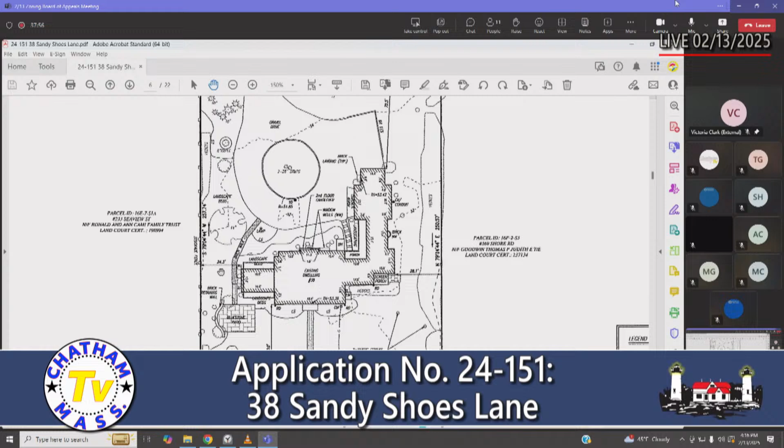As we get into the proposed project, you can see here on that westerly abutter it's 24.3 feet. That's our non-conforming issue, along with the lot area.

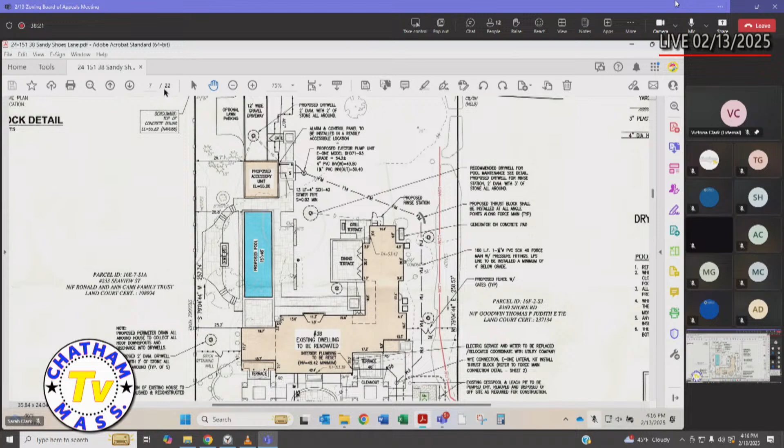The proposed structure—we're planning minor alterations and additions to the structure. We've been before the Chatham Historic Commission to review these additions. They've approved our project and worked with us to get to this final solution. The proposal includes removing this one-story addition on the westerly side and rebuilding it with additions that expand it front and back and add some second floor space, but also push it back so now we're conforming to 25.2 feet, making the entire structure conforming to the setbacks.

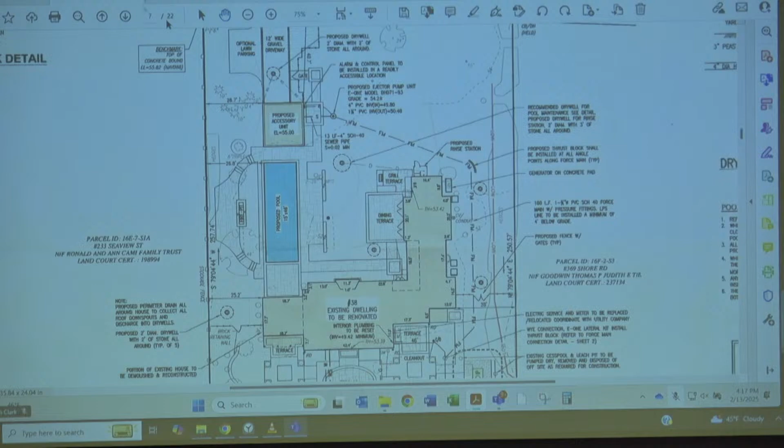Other additions include a proposed accessory structure, some minor alterations and infill of covered porches on the back side, some dormer work along the top, and if we go to Z6, the elevations sheet. Oh, sorry, you have control.

So here we have the existing elevations on top and the proposed elevations on bottom, and you can see this one-story bump going westerly. This is built on a brick pad. We don't believe there's any substantial foundation underneath it. So we're turning it, it is conditioned space currently, it does have baseboard heat. We are removing this bump to include a second floor over it, and again, expanding it frontward and backward.

You can see the dimension here, 19'4". We're at 18'8", so that is pushing in to accommodate that setback. Other changes include the single window dormers on this roof line going to double window dormers. The view from the second floor is quite amazing, and we have very small opportunities in the existing for that view.

Over Shore Road and onto the bar and water view out beyond. The rest of the changes, we're replacing windows, updating siding, locating windows in exact locations and updating the screen porch here. You can see this new chimney structure—that is a faux chimney structure. It's a nod to the original blueprints we found of the property from 1930, where this was included as part of the original scope of work, and we felt it a nice nod to the original design to bring that back.

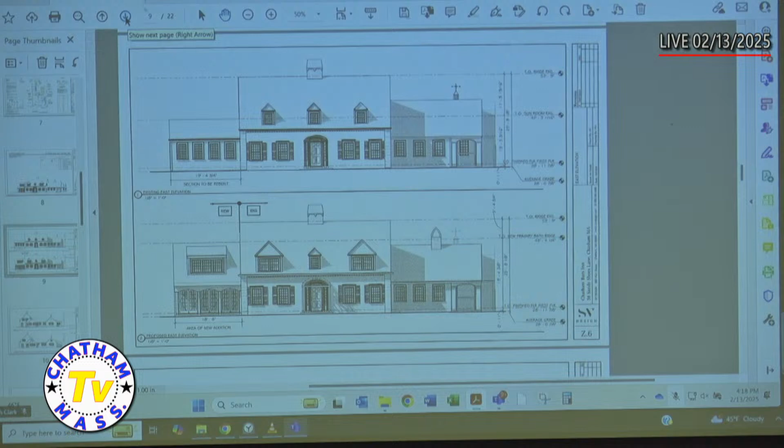If we go to the next sheet, please, Sarah. So on this northerly elevation, there's not much change. Again, we're updating siding, updating trim, reworking the original details as best we can, trying to preserve as much as we can, replacing in kind where we can't. You can see some of the windows have changed location slightly. We're altering some of the windows in this center section and creating a habitable space in this garage and lean-to structure on the side. Next elevation, please.

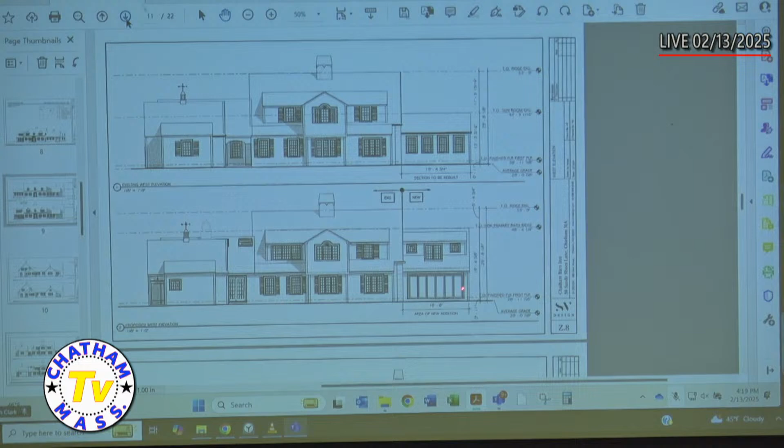From the Sandy Shoe side—Sandy Shoes is an interesting lane tucked between Shore Road and the golf course, you might never know that it's there. So this is the approach from that backside as you're coming around the corner. You're seeing here this existing covered porch and this inside L, where we're infilling that with habitable space, some exterior doors, and increasing the habitable space from the inside. The main block of the house, you can see we've added a couple of windows, but we've also replaced in kind some of these interesting windows with the Palladian half circle, the gang of threes here, and then again the addition, removal of that one-story section to a two-story or 1.5-story addition to the west.

Then the southerly elevation, again, removing that one-story sunroom and building up this, what will be a family room on the first floor and a bathroom and closet on the second floor. Some other changes, again, infilling that covered porch and altering the garage structure. And again, this is very much a nod to the original design from the blueprints we found—these arch-shaped doors, this circular window, and arch-shaped window with the shutters here, very much in tune with what was happening from a design in 1930.

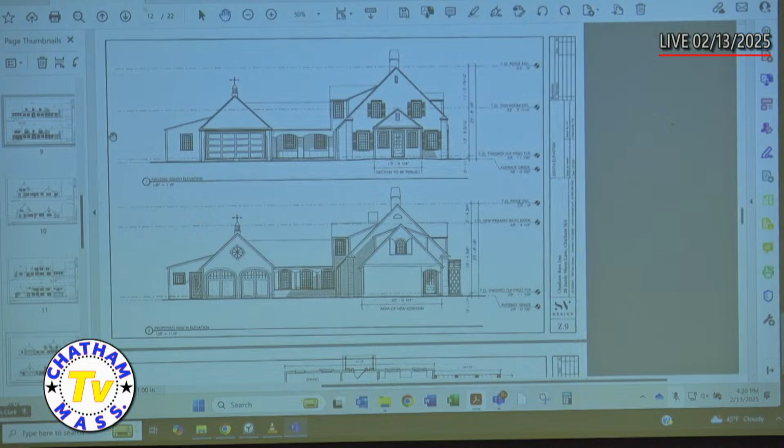The new accessory structure will have storage on the lower level and an office space and bathroom on the upper level. It's a reasonably small structure, 380-foot footprint. And then likewise, we have a pool that's situated behind this structure and in between the main structure.

So here the proposed site plan shows the elongated pool, the accessory structure, our new footprint of the addition, and then patios and landscape and hardscape are also shown on this plan.

The materials used for this renovation—generally we're trying to match the existing as best we can. So the existing siding is an oversized cedar shingle. We will have painted trim and details, again, working as hard as we can to match or recreate the details that are on the house. We find that those details are very important, both historically and for the structure itself. There's a small handful of homes that have similar details on Shore Road, but they're not seen very often in Chatham. So this is a gem that we're looking to bring back up to a particular level of finish. The roof line does have a red cedar roof underneath the existing asphalt, so we're going to revitalize that detail as well and bring back the red cedar roof.

As Sarah had mentioned, our existing building coverage is at 8.5%, 3,110 square feet. We're going up to 9.9% at 3,635 square feet. Again, all mechanical equipment will be conforming to the setback.

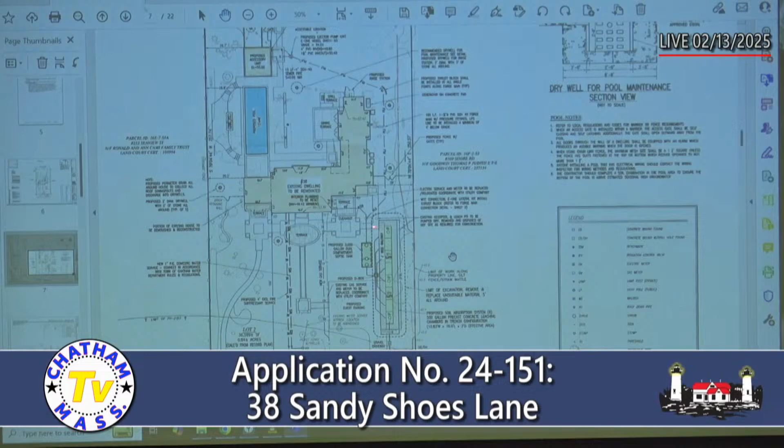Okay, so we're going to have those two questions put to our applicant. Septic system first, generally yes - there is a septic or cesspool system on the northern side of the property, just above, hovering over the leaching field for the proposed system. That system is meant to be replaced, it needs to be replaced. The house was used very sparingly in recent years, and the septic system is not in good condition. The new leaching field will be completely buried, and the tank will be further away from the property line on that northern abutter. But yes, this septic system will be placed here on the northern side of the property.

The proposed structure here is a 1.5-story structure, storage on the lowest level, and it's going to be used as an office or writing office. On the second floor it will have a bathroom, but it is meant for storage on the lower level and an office space on the upper level.

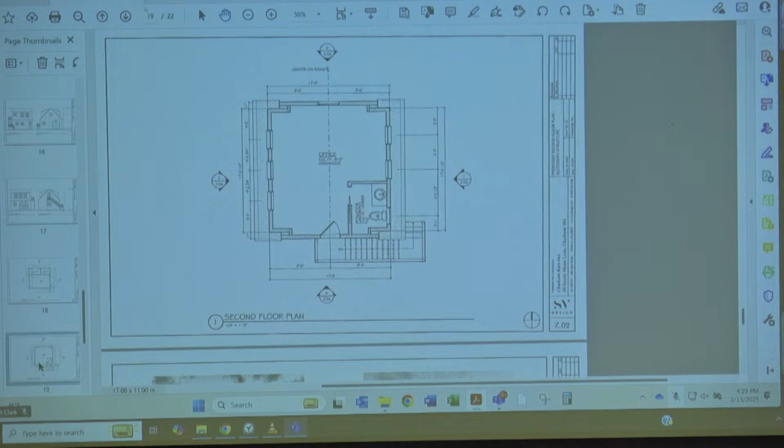Does that answer your question, Mr. Goodwin? What is the height of that building? 19'4" to the highest point of the ridge.

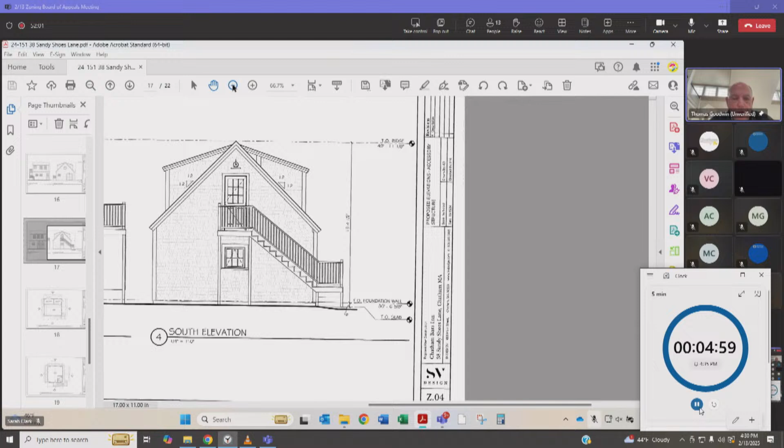So here's one of our concerns. We have incoming golf balls from the golf course, and the way our house was built, it was not square to the property, so we actually face the golf balls and we certainly get them. Anything on this project that would improve that would be welcome. Currently we have a very high privet hedge that goes down the complete northern line of this property, and it does block golf balls. It is therefore desirable, and we haven't been told anything about the state of that. If that gets taken away, that's not good news for us - our property is going to be shelled with golf balls.

So is your question whether or not that area is going to be taken away? Yes. Okay, can we have an answer? We intend to keep the privet, and in fact build it into a buffer for a slightly better level of privacy. We understand the golf balls - we find them every time we're there. The accessory structure won't protect his property at all; in fact we might get pegged with a few errant golf balls, but the privet on the northern edge is meant to stay. You heard that sir? The privet is meant to stay? Yeah, we appreciate that.

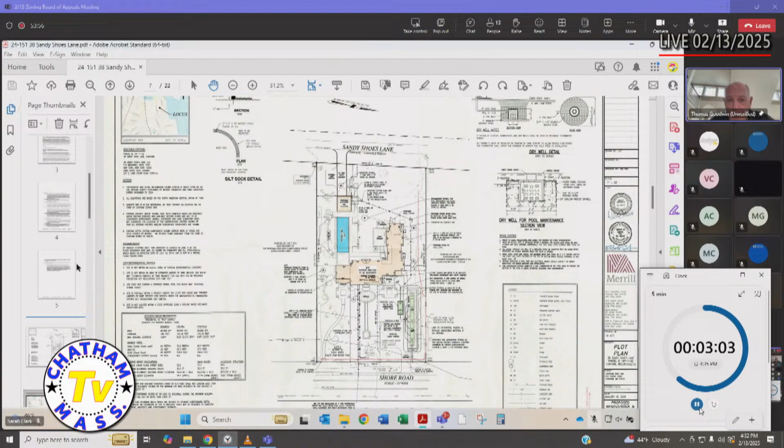So I asked at the historical commission review about the northern side of this building, and we understand it's non-conforming. I'm guessing, because I'm not a pro at this, but if it's pre-existing and non-conforming it can remain - is that correct? Yes, okay, subject to a special permit that they are now seeking.

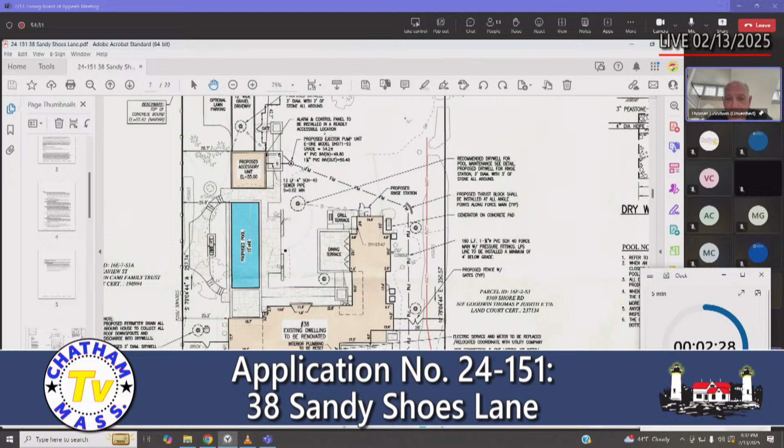And if I may, I also understand, Mr. Goodwin, the northern side of this structure is conforming - we're 28.3 feet away from your property line, where 25 is required. In fact we've improved the situation on the southern side by moving the structure away from the property line, so now the full structure is a zoning conforming dimension to the setbacks. Even better. Yeah, even better is right. I appreciate that, thank you. We're just trying to understand what's coming our way. That's about the size of it.

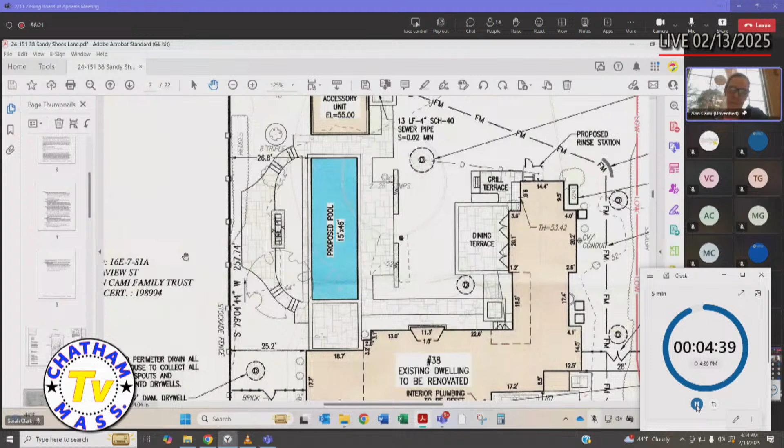I just have two quick questions, and one may have already been answered. The first is about how far the pool will be from our property. The second is about the use. Obviously, we love being in the middle of Chatham Bars Inn, but we kind of like being across the street, so I just wanted to confirm once again that this property is only zoned for residential use, if I'm understanding correctly.

We'll let you answer that. Okay, the first question, the pool separation will be zoning conforming. We are 26.8 feet away from the property line to the edge of the water, and we intend this to be a single-family residence.

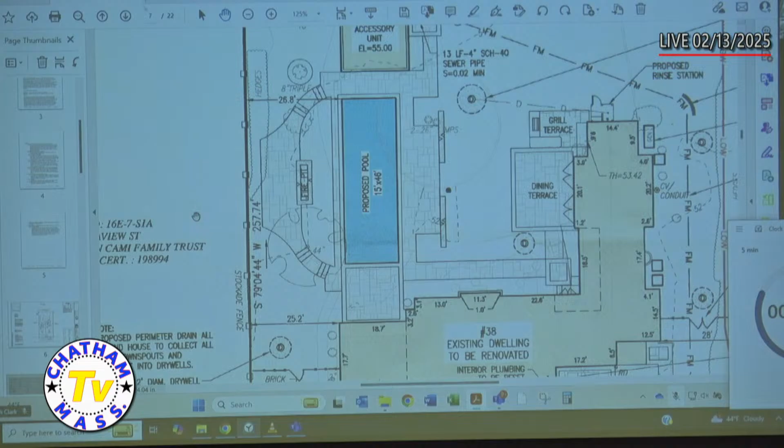Well, in that case, I just want to say it looks beautiful. As most people know, we just did a big renovation ourselves and faced similar hurdles we had to jump over, so wish you the best of luck. It looks like a beautiful design. Thank you.

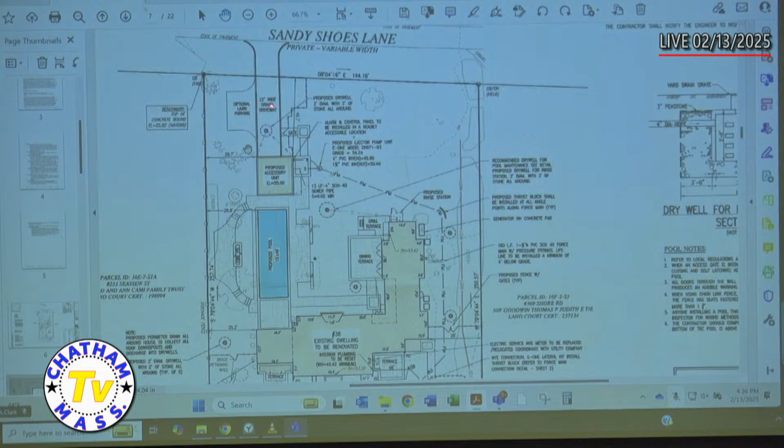Okay, can you show me that? So the Sandy Shoes existing driveway, you can see the lines that travel in here. We're going to make it a little bit more angular to the rear property line. So we're coming in, we have essentially 2-car parking opportunity in the back. And then if we scroll down just a little bit, that curb cut coming in will give us maybe 2, maybe 3 spots of parking in the front.

Okay, sufficient for 7 bedrooms, large home? I think so. Okay, no garage? That's going away, that's becoming a playroom? Yeah, becoming a playroom.

Okay, related to the woman, the neighbor who just called in, the single-family residence - I can't help but notice that the markings say Chatham Bars Inn. Would there be any chance in the future where that single-family residence would change? Like, how that couldn't happen? I'm getting to that question that the neighbor asked. As it being part of Chatham Bars Inn, no. Right, it's a single-family residence. Okay, all right, that's all I had, thanks.

Steve, questions? Don't really have any questions. It looks like a nice project, but I did just have an observation. On page Z3... How about if you save that for deliberations, unless it's a question? We're trying to - it's a question, okay. You said it wasn't, so now it is.

There's a call out to bath number 2, and it looks like it's pointing to a closet, and bath number 3. But then there's also a call out on the next page, I think on Z4, where those 2 bathrooms are on the 2nd floor. So if you could just correct that. Sure, I think it would be appreciated - a numbering issue, but yes, there is a bathroom on the 1st floor, and it's an existing bathroom, and we're renovating it. That bathroom is meant to stay and remain. Yes, that's called out as bathroom 2, and there's bathroom 1 over here. The 2nd floor on the next sheet should be bathroom 3 and 4.

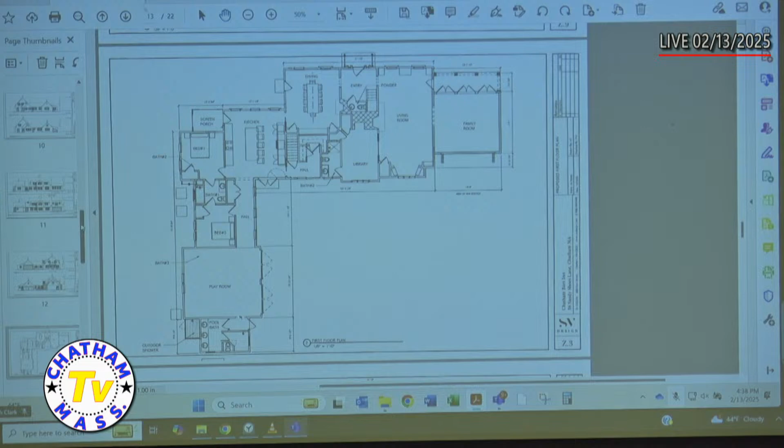Right, okay, thank you. Okay, questions? Just a question about the accessory structure - does that not have a garage in it? It does. We are making minor modifications to that, and we'll approach Sarah with the minor modifications to include no garage in that space, but our application has a garage.

Okay, thank you. And Paul? Yeah, my question actually related to the use as well, but I take it from your responses that this is not going to be part of the CBI rental properties that are available. The ownership group is from CBI, yes, but we intend this to be a single-family residence. Okay. Unfortunately, some of those golf balls that you're finding there are probably mine. I have no other questions.

David Nixon, questions? Yeah, several questions. I understand what you say, it's going to be a single-family residence. But looking at the ownership, it will be rented, I presume, through the same entity that rents CBI.

That only makes sense. I mean, that is also true, I believe, of the octagonal house, that is a separate ownership, is it not? I don't know. You know, I think it is, because, anyway. So,

When I was there observing that building, I thought to myself, you could cut it up pretty easily and make it 2 units, because it's held for rental and all that kind of stuff, but there's something about maximizing rent value if you had a single-family home, and from what you say, that's what's going to happen there. You could be talking huge dollars per week, which has nothing to do with you, and I understand that. Did you draw up any other plans for this that indicated a possible 2 or 3 unit building?

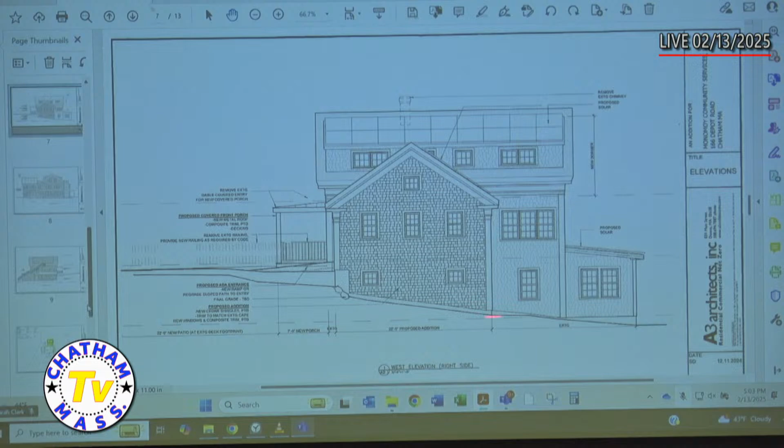And if we could look at the next slide. Here we are on the west elevation, so you see this is the proposed 1 story with the walkout basement level below, and you can see that the historic structure does that as well. There have been a number of additions to the historic structure, so this is existing, and we're proposing to renovate the historic piece, but it is an existing appendage to the historic building.

We can look at the next slide. This is the back elevation, facing the ball field, and you can see this is the historic structure. It's a Greek revival. As I said, it's been touched. It has a very monumental stair coming down to the field. And again, we're using this walkout level for children's activities, and we are proposing solar panels.

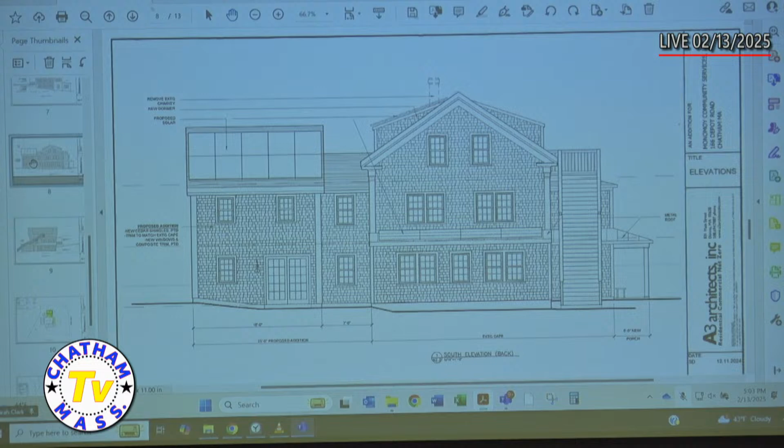You see those on our sunny south elevation. And the next slide, this is the east elevation, and as it works now, many kids who enter the building come down this side and enter to the lower level, so we're proposing a covered entry at this. Again, as Bill mentioned, we're just hoping to make the building more accessible and more friendly. This area is being renovated, a small cubby or mudroom for the kids coming in and out.

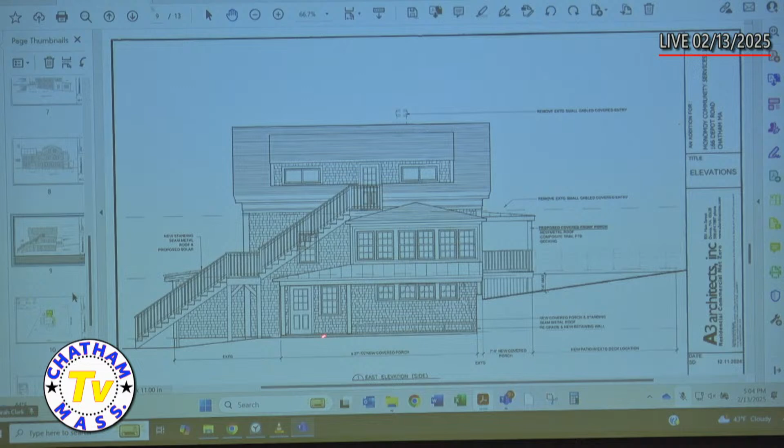And next slide, so in yellow, we're showing what's being proposed. We're working our way up. This is the lower level, currently a children's center. We're just proposing, as I mentioned, this kind of more robust entry, a mudroom with cubicles for storage for coats and kids, and we have new mechanicals and storage in the yellow new footprint area.

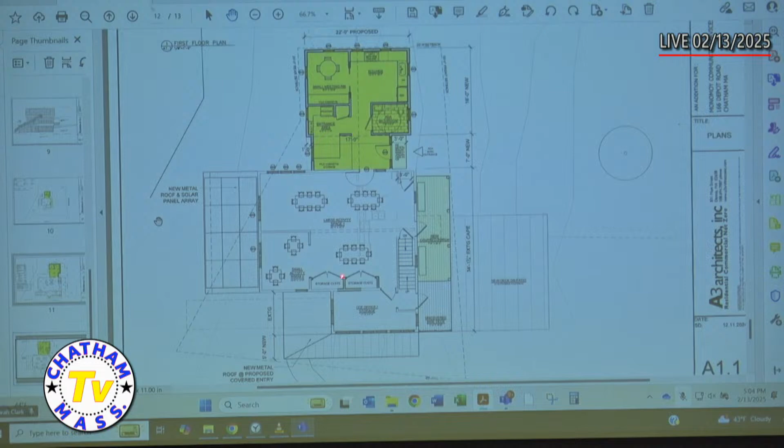We can look at the next slide. And this is the main level where we're showing a proposed covered entry, again, to make it more accessible. And then our new proposed area is all handicap accessible, and we're proposing just more space, more business space, more office space, an accessible bathroom and kitchen, and expanded or opened up and renovated children's area and storage areas.

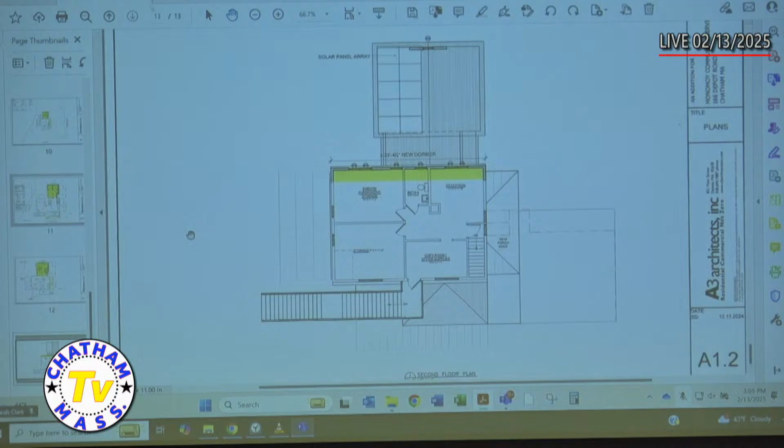Next, and this is the proposed second floor. This exists. We're proposing a new dormer, as I mentioned, and this is a storage and office space on the upper level. So it's quite a minor, I would say, smaller addition to what's there, but we just think that we're looking at the building in its totality and trying to improve it for the nonprofit so it works a little bit better for them. I'd be happy to take questions as they come.

Thank you. Attorney Litchfield, continue. Thank you very much. Thank you, Allison. While we're in the small business zone, the neighborhood is, as you know, largely municipal.

Given its long-standing relationship with and support by the town, MCS fits in this location. In light of the somewhat, we think, both minor and appropriate nature of the request before the Harrison case, all of what we're seeking could have been granted by special permit. And in fact, for reasons I'll touch on later, I think they still can.

But we've applied for both a variance and a special permit because, since Harrison, structures other than single-family residences are deemed to require variances for changes. That may apply to one, but only one, of the changes here proposed: the reconstruction of the deck on the Depot Road north side, which is currently 30 feet from the street, where 50 feet is required.

As we know, variances are appropriately granted sparingly, but they can be granted when the criteria are met, and I think you can find that they are, as I'll show in a bit.

In fact, if we can reconstruct the existing elevated deck as a ground deck or patio and still be compliant with ADA regulations, we'll do so. If it becomes a patio rather than a deck under the historic interpretation of our bylaw—which is that patios aren't structures and don't have to meet setbacks—we may not need that relief for this aspect of the project.

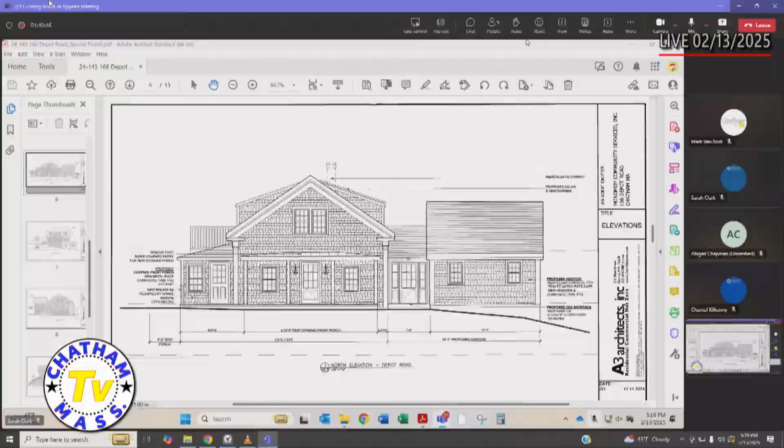Okay, Paul? I'll move to close the hearing and move into deliberations. Dave Veach seconds and votes yes. Ginny votes yes, as do I. Deliberations, David Nixon.

If I even thought about voting against this, I think my mother would rise from the grave and give me a good whack right in the head. There's certainly not substantially more detrimental to the neighborhood. It's an improvement all the way around for the neighborhood. The additions look very well, and anyway, I can help contribute to the work of Monomoy Community Services. I'm always happy to do so.

Very good. Excuse me, Paul? Yes, I agree, it's certainly not substantially more detrimental to the neighborhood, that's for sure. And Lee? Yeah, I agree.

It's not substantially more detrimental, and I would actually argue that it's beneficial to, as Attorney Litchfield said, the center of the community for Chatham. I feel like that whole area is one of the hearts of Chatham, with the ball field, the community center, the fire station, the railroad museum, the tennis courts, and the elementary school. That is a really, really important part of Chatham. To support our families and children with a renovated Monomoy Community Service building is priceless. You have to do it.